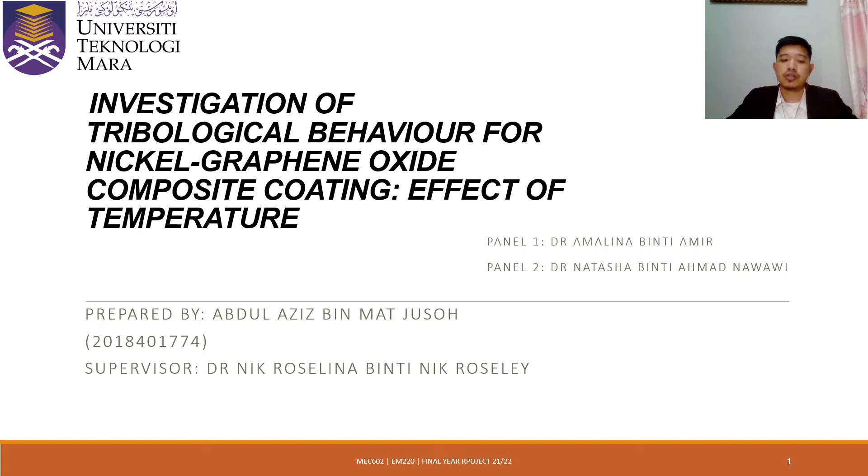Today's presentation agenda: number 1, Introduction about the project; number 2, Project Methodology; number 3, Result and Discussion; and lastly, Conclusion and Recommendation.

Before I go to the introduction, I would like to explain the problem statement. Friction coefficient, contact between surfaces, contact pressure, frictional force, and other factors influence the tribological performance of material. Several studies have been conducted to identify the influencing parameters and their impact on overall tribological performance with or without coating. The purpose of this work is to investigate the tribological properties of nickel graphene oxide composite coating.

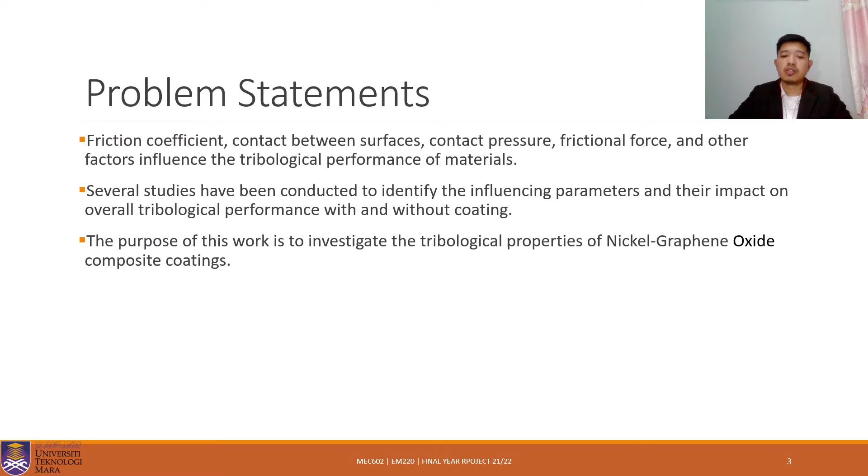To overcome these problems, the objectives have been set. Number 1, to fabricate nickel graphene oxide coating on mild steel at different deposition temperatures. Number 2, to study the tribological behavior of nickel graphene oxide composite coating.

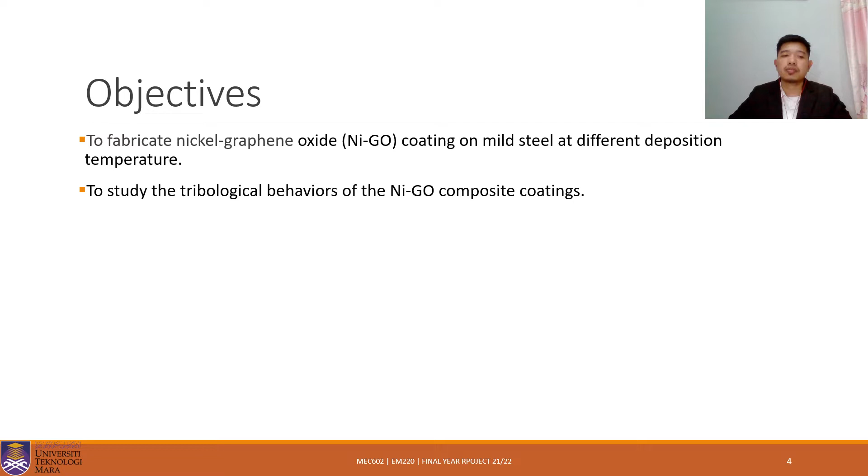For the introduction, tribology is the analysis of friction, wear and lubrication on moving surfaces. Tribology can contribute to the energy efficiency and cost of industry. Nickel graphene oxide was used as a coating for this study. The tribological behavior of nickel graphene oxide composite nano coating was analyzed using a pin-on-disc tribometer.

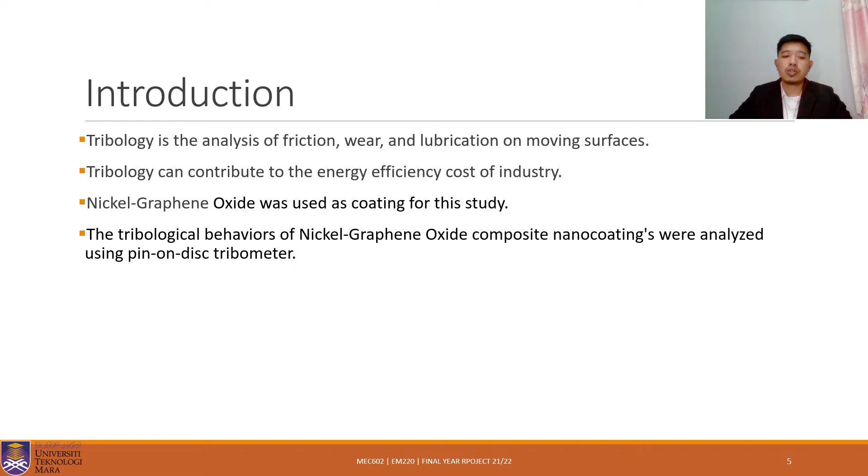Methodology for this study: number 1, preparation of substrate. A rectangular mild steel was used as a substrate as shown in figure number 1. 4 samples were grinded and polished using grit sandpaper 120, then 180, then 320, 600, and ended with 1200.

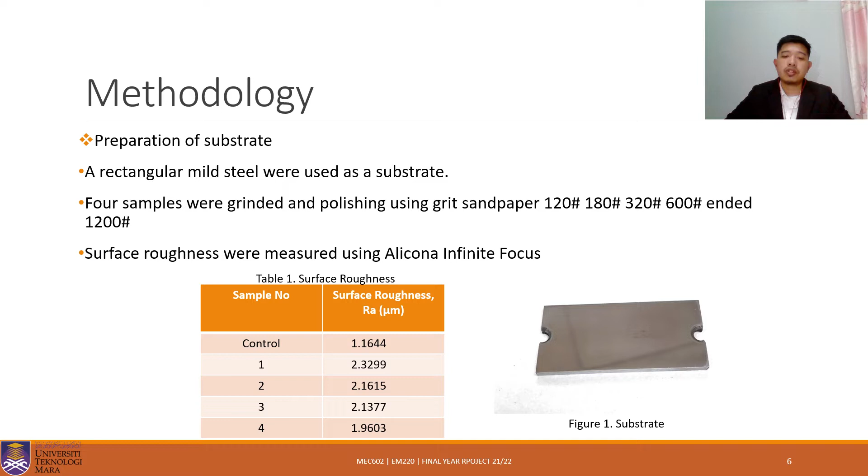The surface roughness was measured using Alicona infinite focus and tabulated in table number 1. As you can see, sample number 4 had the lowest surface roughness among the other samples.

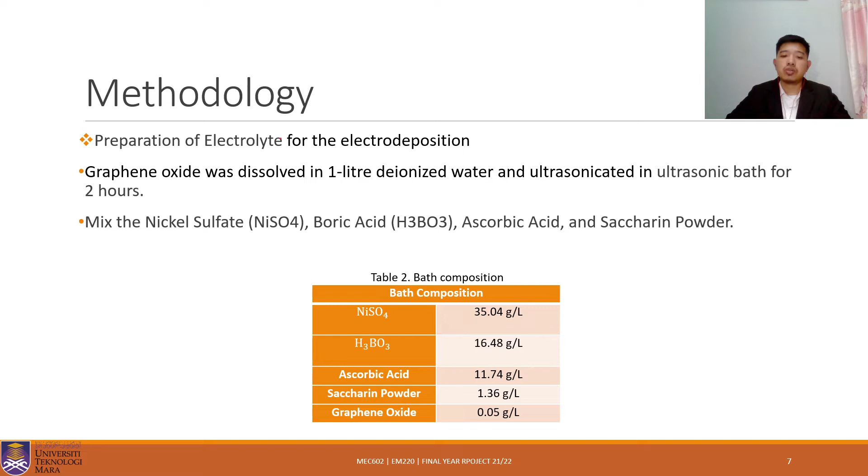Next is preparation of electrolyte for the electrodeposition. Graphene oxide was dissolved in 1 liter deionized water and ultrasonicated in an ultrasonic bath for 2 hours, then mixed with nickel sulfate, boric acid, ascorbic acid and saccharin powder. Table 2 shows the bath composition.

After that, the electrodeposition process. The variable of the experiment is the temperature of electrolyte, which are 35, 45, 55, and 65 degrees Celsius. The stirring speed is 300 rpm with constant current of 2 ampere for 45 minutes. Table 3 shows the electrodeposition parameters.

Sample number 1 used 35 degrees Celsius, sample number 2 used 45 degrees Celsius, sample number 3 used 55 degrees Celsius, and sample number 4 used 65 degrees Celsius.

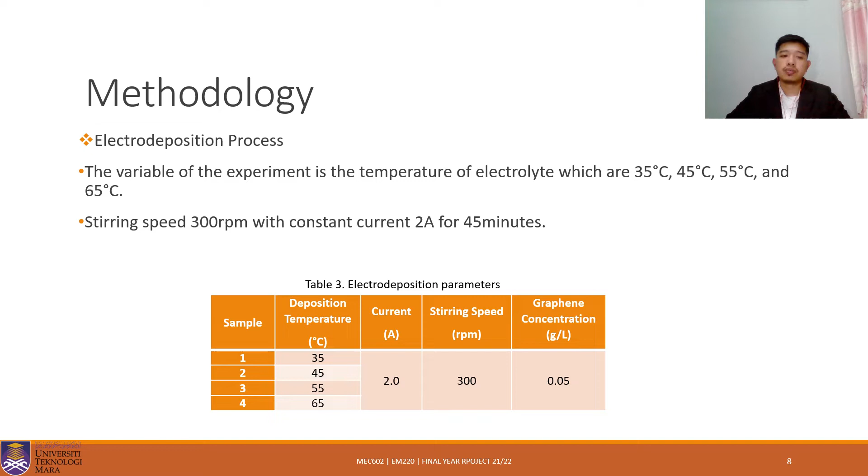Next is characterization technique. Number 1, micro hardness of coating: we are using a Vickers micro hardness test machine with a load of 1 kg force. Second, chemical composition of coating.

To analyze the structure pattern of the coated particle with the range angle 2 theta from 30 degrees to 100 degrees. Surface roughness of coating: Alicona infinite focus was used to quantify the surface roughness of the coating sample.

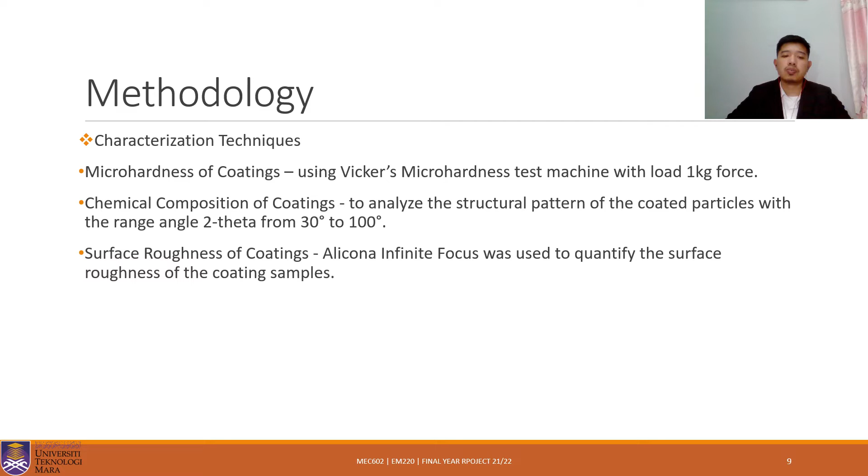Lastly is the tribological test. Pin-on-disc TE-165-SPOD was used for the tribological testing. All samples were tested for 20 minutes at a rotation speed of 250 rpm. As you can see in table 4, the pin-on-disc parameters applied were 10 Newton.

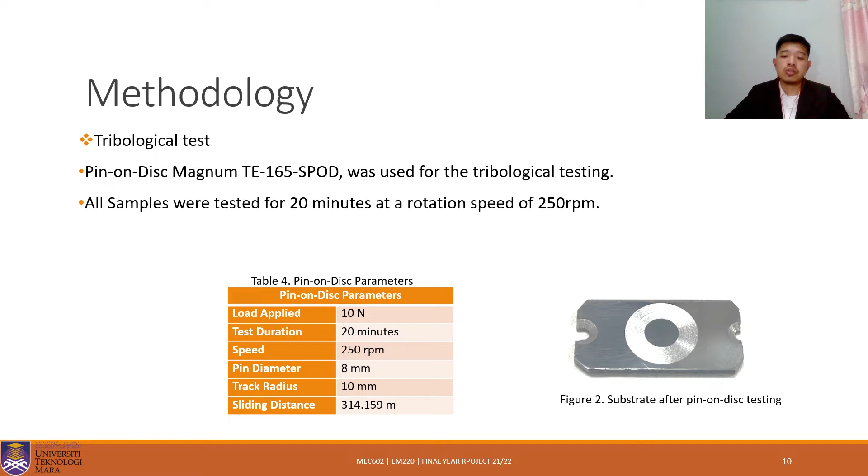Test duration was 20 minutes, speed 250 rpm, pin diameter 8 mm, track radius 10 mm, and sliding distance 314.159 meters. Figure 2 shows the substrate of the pin-on-disc test.

Next, we move to result and discussion. Hardness of coating: 3 different spots on the coated surface were measured to find the micro hardness and tabulated in table number 5.

The control sample has a micro hardness value of 204.2. Sample number 1 has 266.5, sample number 2 has 274.8, sample number 3 has 352.8, and sample number 4 has 357.7.

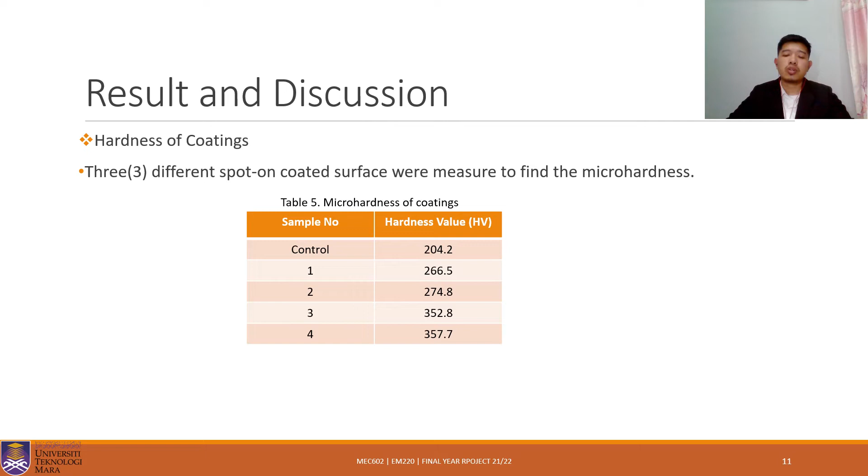According to figure 3, sample number 1 had the lowest micro hardness of 266.5 Hv, while sample number 4 had the highest micro hardness of 357.7 Hv. Based on the result, the hardness of coating seems to increase with deposition temperature.

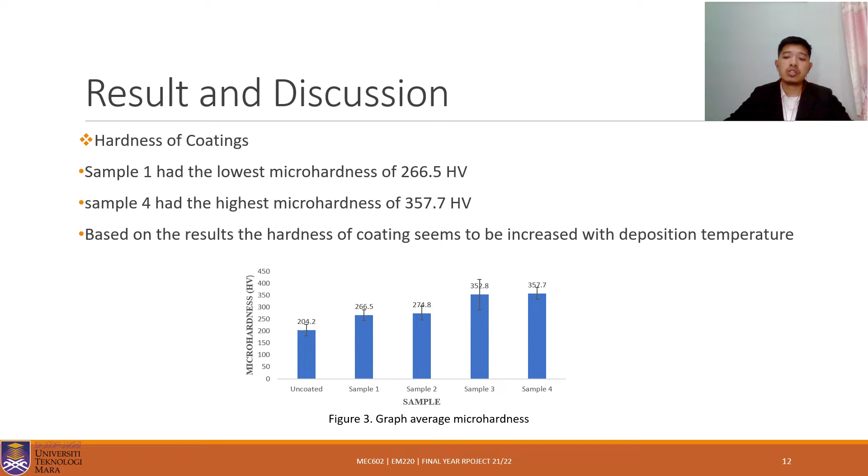Next is chemical composition of coating. Overlapping between graphene and nickel at 44.8 degrees for sample number 1 in figure 4a. Sample 2 in figure 4b has an overlapping graphene and nickel at 44.7 degrees, whereas sample 3 in figure 4c has an overlapping graphene and nickel at 44.6 degrees. The graphene and nickel overlap at 44.7 degrees in figure 4d.

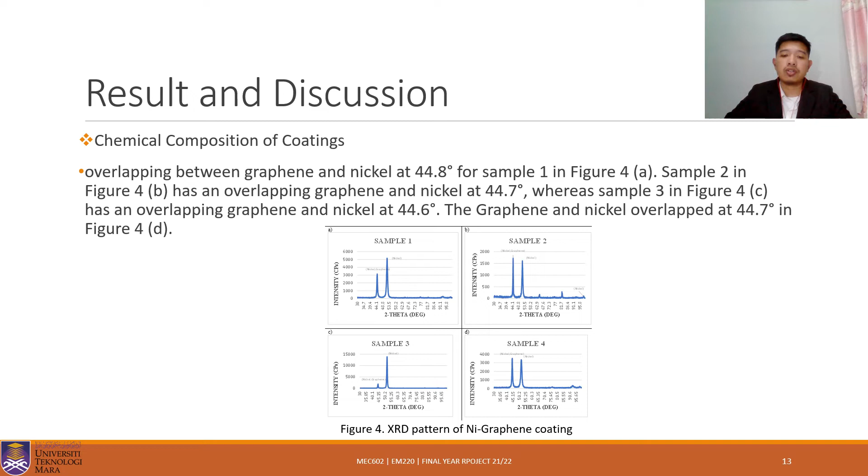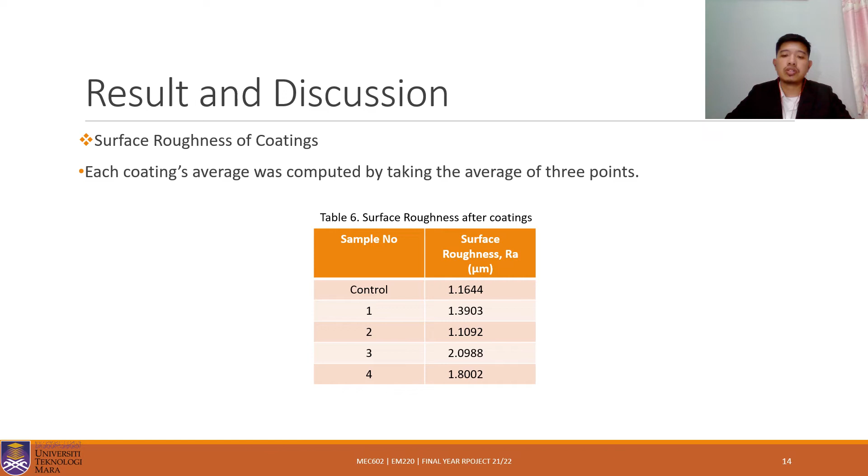That is surface roughness of coating. Each coating average will be computed by taking the average of 3 points. Table 6 shows the surface roughness of the coating for all samples. Data from table 6 were plotted in the graph in figure 5.

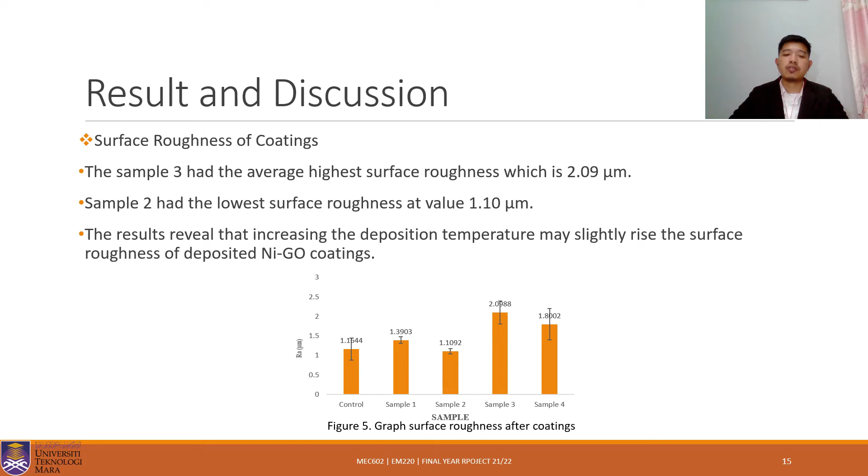Sample 3 had the average highest surface roughness, which is 2.09 micrometers, while sample 2 had the lowest surface roughness at a value of 1.1 micrometers. The result revealed that increasing the deposition temperature may slightly raise the surface roughness of deposited nickel graphene oxide coatings.

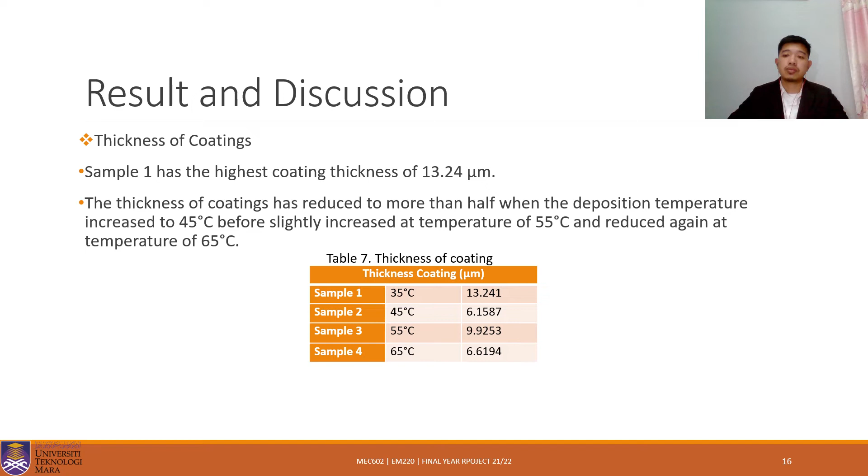Data from table 7 were plotted in figure 6. The result indicates that deposition temperature of nickel graphene oxide coating has considerably influenced the thickness of coating. The temperature of the nickel graphene solution does not have much effect on the coating of the sample.

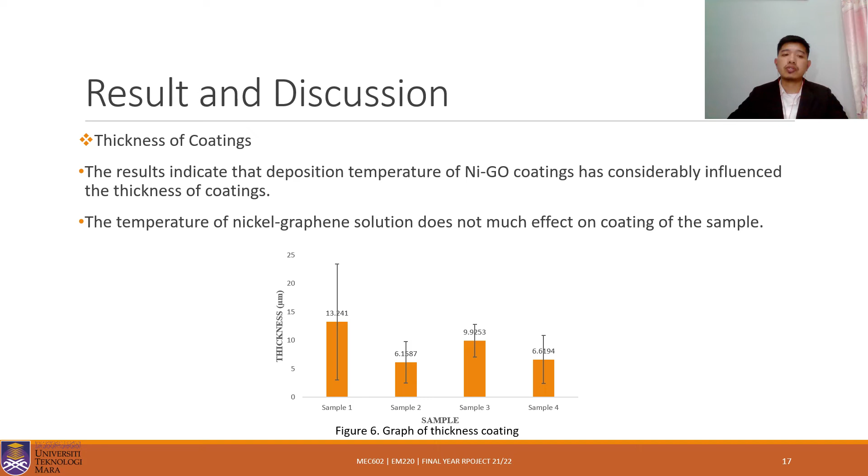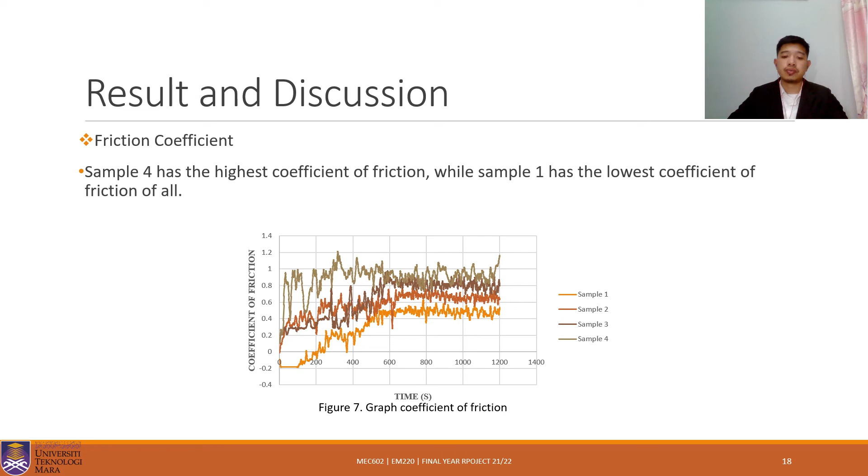Friction coefficient: Sample 4 has the highest coefficient of friction, while sample 1 has the lowest coefficient of friction of all, as shown in figure 7. Compared to the bare sample without coating, the friction coefficient of all nickel graphene oxide composite coatings was lower, as shown in figure 8. The graphene layer inside the nickel graphene composite strongly reduced frictional wear of the sliding contact.

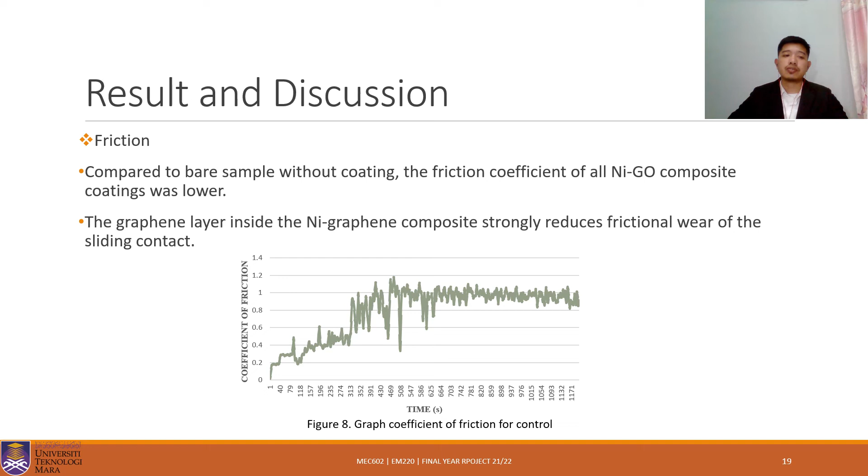And lastly, for the wear test, sample 4 has the lowest wear because of the higher micro hardness it has, which is 357.7 HV, while sample 2 has the higher wear because of the thin thickness of the nickel graphene composite coating, as shown in figure 9.

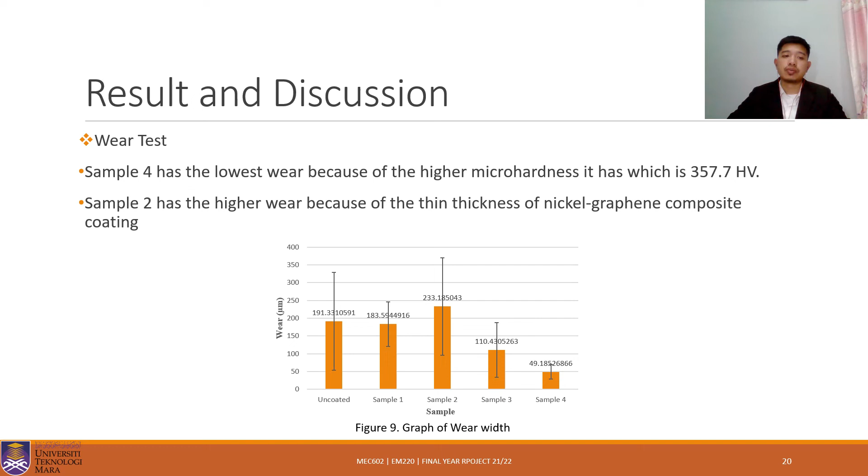Figure 10 shows the sample 4 lost just 0.0196 grams, whereas the control lost the most weight, 0.2132 grams, with a difference of 0.1936 grams when compared to sample 4.

Sample 1 lost 0.0972 grams, with a difference of 0.0776 grams. Samples 2 and 3 had losses of 0.1821 grams and 0.1547 grams respectively.

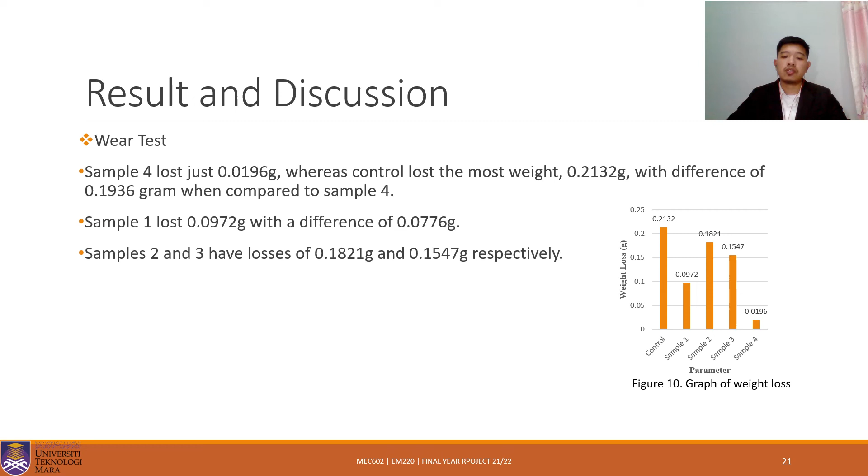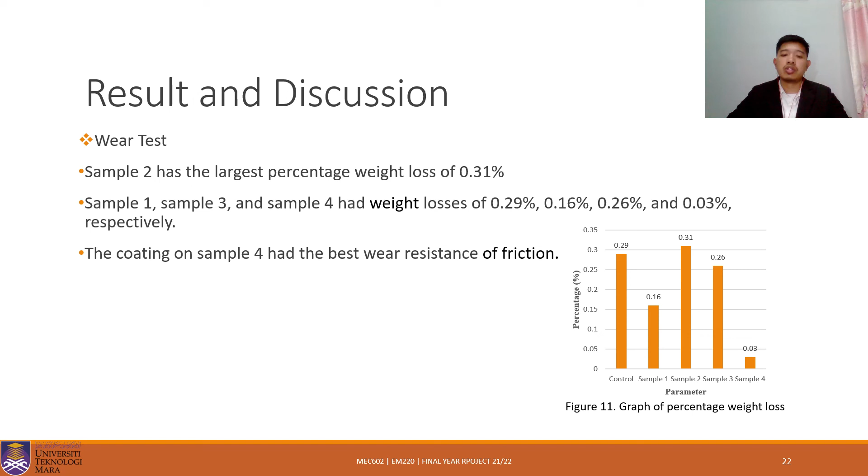Sample 2 has the largest percentage weight loss of 0.31%. Sample 1, sample 3, and sample 4 had weight losses of 0.29%, 0.16%, 0.26%, and 0.03% respectively. The coating of sample 4 had the best wear resistance of friction, as shown in figure 11.

For the conclusion, the electrodeposition process has been used to successfully fabricate nickel graphene oxide composite coating at deposition temperatures of 35, 45, 55, and 65 degrees Celsius.

The results show the increase in deposition temperature enhances the micro hardness and increases the surface roughness of nickel graphene oxide composite coating. Sample 4, which was deposited at a temperature of 65 degrees Celsius, has the highest friction coefficient of 0.92. It has the lowest wear compared to other samples.

Sample 1 recorded the lowest friction coefficient of 0.43. The outcome of this work suggests that the higher the sample's micro hardness, the lower the wear rate.